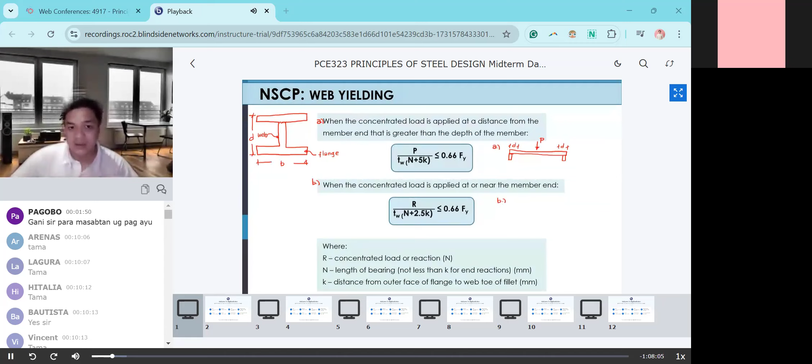For category letter B, this is when the concentrated load is applied at or near the member end. So what we're analyzing, as I explained earlier, I placed the P at our support. It doesn't mean it's literally at the support — what's called 'when the concentrated load is applied' refers to the reaction coming from P.

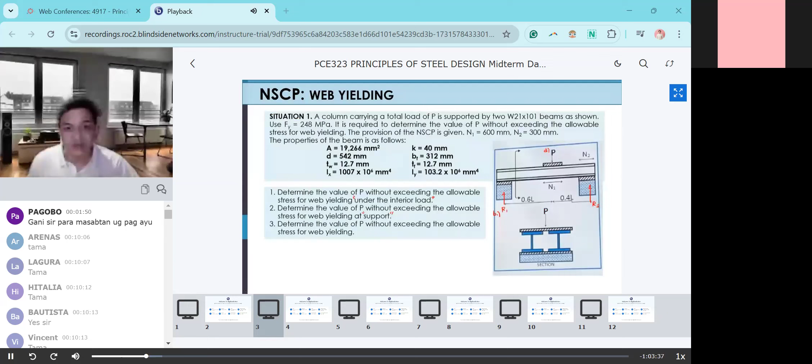Pero under the interior load, so atong gamiton... explain natin ulit kung bakit naging N plus 5K. Take note class, parang low-key lang, manggud ni siyang force over area. Kaning left side, that is just force over area. Ang force po natin class is si P, then ang area po natin is yung area ng ating bearing, kung kinsa tong na-bear na area.

So unsa man tong na-bear nga area? Ang atong thickness sa web, rectangle lang gud na. I-drawing na ako para masabtan. Mao ang bearing area. Kani nakatagilid ba kani kay ito yung length natin, pero pag kuan man good class, magkalat man gud na siya gamay, pa-triangle, so na siya extra.

Imbis na N1 lang yung ating ito yung TW, di ba? TW ni siya, pero yung ating total length, di ba dapat N lang, pero kay pa-triangle manggud na siya. Based sa NSCP, yung pagkalat daw ng ating bearing is kanang triangle, that is 2.5 times our K. Sa kabila din, that is 2.5 times K. So that's why pag yung P yung ina-analyze natin, ang formula is 2.5 plus 2.5 K, that is 5K. And syempre, yung N1 natin nasa gitna, so that is N.

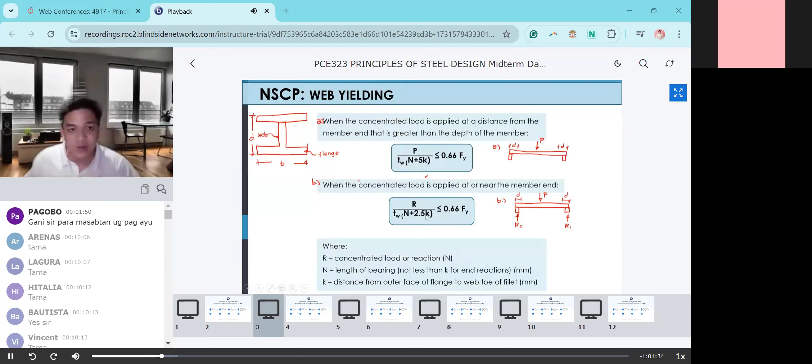So explain naman din natin sa letter B. Sa letter B, bakit 2.5K lang siya? Kasi we are considering our support, then spread kasi sa support is diri lang nga side, asa man pag diri ka mag-spread, wala naman kay mas spreadan dra, di ba? So this is our N2.

Parehas lang sa pikas, no? So ito yung N2 natin, so ito yung extra natin na length, because sa pag-spread sa ating bearing, that is 2.5K. So therefore, pag sa support, that is N plus 2.5.

Timanan ninyo, so hindi ko na to uulitin, no? So P over TW, 0.66. Then i-calculator na mo kaganina, the answer is 1662 sa letter A.

So type tama sa ating chat box kung tama ba yung ginawa natin sa letter A. Are you still there? Yes, how about the others? Yes, very good. Kamera lang yun eh. Sige. That is, yes, that is tama.

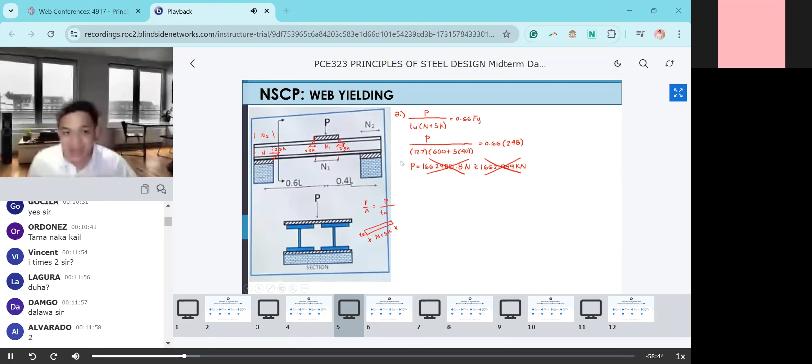Murag og strength of materials, di ba? Pag dalawa, we have two choices. Pwedeng i-times 2 natin yung area. So mag-times 2, mag-2 ta diri di ba? Kani, area man natong ginastoryahan, di ba? Kani, area, duha man na kabuok. So dapat times 2.

So pwede ta mag-force over 2 area. Pwede punta na hation si force, magiging force over 2 divided by isa ka area. Pero parehas naman na, di ba? Ibaba nimo o ana, so namang gyud mga nanang analysis, mali siguro na iya sir kay times 2 na yung area, ako gi-divide na kog 2. That is just the same.

So therefore, ulitin natin yung letter A natin. Pwede ha, again, pwedeng mag times 2 ka sa area, pwedeng mag-divide 2 ka. Parehas lang na. So ang gagawin ko dito, i-divide ko yung P, P man gud na. So ibig sabihin, this is P over 2 and P over 2. So anong gagawin natin? Ito lahat, copy-paste lang natin, pero may P over 2 lang tayo.

Diba? Kay kani man gud siya nga property, pang isa lang siya ka I-beam. Pero take note sa ating problem is, dalawa yung I-beam natin. So TW natin is, multiply ko na lang diretso na, P over 2, 12.7 times 600 plus 5 times 40 is equivalent to...

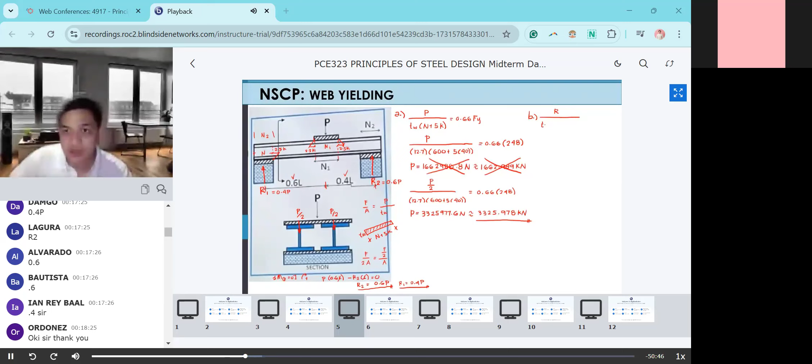Okay, so proceed tayo next. Yes, sabi dito, ang gagamitin po natin is yung mas malaki. Si 0.6P yung gagamitin natin. So formula muna tayo, R is divided by, divided by TW N plus, kapag sa support, yung pag-spread ng bearing is 2.5 lang siya, K. It's equivalent to 0.66Fy.

Substitute natin, R natin na gagamitin is si 0.6P, divided by TW natin is 12.7, N natin, so ang N na gagamitin natin is si N2. N2 ha. Okay, para man siya N2. Ano siya N1? Okay? So N2 based sa ating problem is ayan 300. Plate maguna niya, bearing plate. So plus 2.5, then K po natin is 40. Okay, calculator class. 0.66Fy. Fy po natin is 248.

Sige, isigo gyud. Okay. So what is our P? 1385824. Ay, nahigapay kulang, no? Kung na-discuss na ganyan nato, na mamali na punta diri, no? So 0.6 of P, 'di ba? Pero that is all divided by 2 gihapon. Same sa ginawa natin dito kanina. Okay? So pakidungagan og over 2 si 0.6P. Or i-times 2 na lang na yung answer.

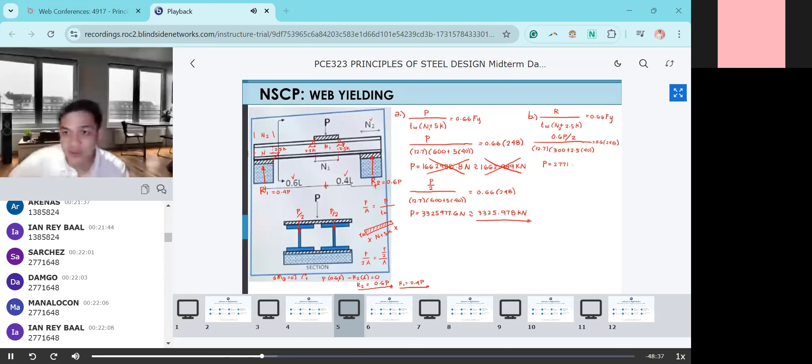That is 2771648 Newton. So P natin is equivalent to 2771.648 kilonewton. Final answer. Ayan. Okay na. Human na gid ta sa first problem.

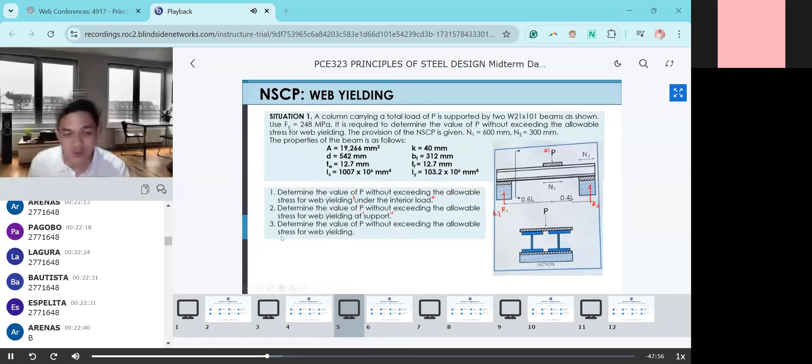So sa letter C, i-type sa chat box, ano yung answer natin letter C? Si letter A, si 3325, or si letter B, 2771? Again, yung question is, determine the value of P without exceeding the allowable stress for web yielding. Bakit sa itong respetuon dre? No? We have two types of web yielding. I-respect nato si P, i-respect nato si support. So paki-type A or B?

Yes, ana gid dapat. Ang dako. Kung magkuan ka, kung mag-design ka tapos ang isa makaya na 3-3, ang sa kani sa gitna na bearing. Ang support ang makaya lang niya 2771.

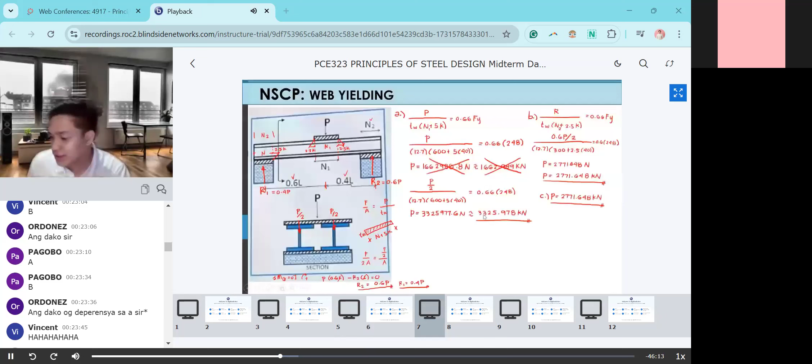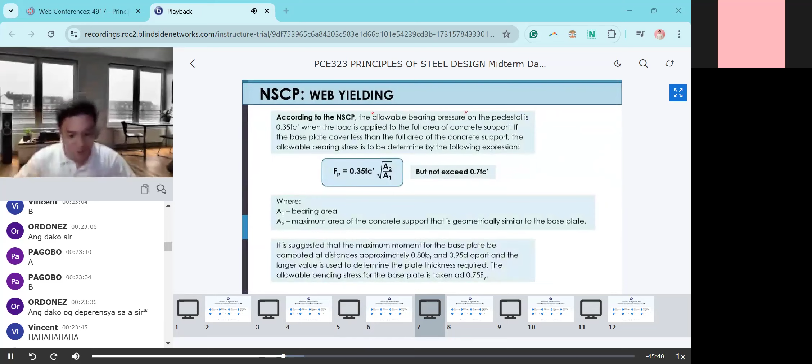Sige na, ilisdan lang ako ng label sa taas. This is under allowable bearing pressure. Daghan makarelate ani kailang mag-agi-agi gud sa dalan no. More on kuan na biya ta karon, more on steel structures na ta.

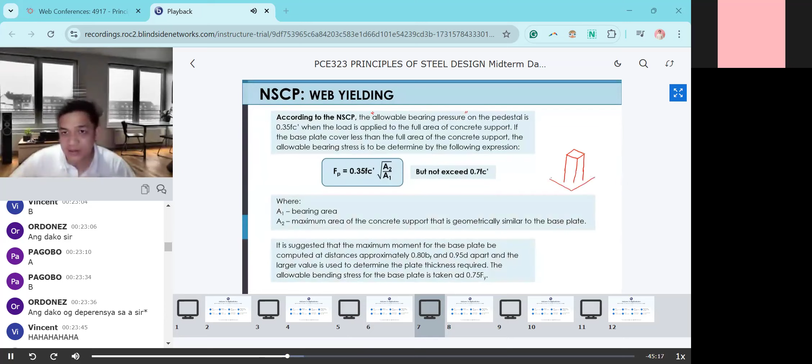So sa mga steel structures class, meron po tayong tinatawag na pedestal. Kailan maguro mo pedestal no. So ang pedestal is combination of concrete and steel. So, di man na makitaan kay sa lalom man ng uban, no? For example lang ana na sa ilalom sa yuta. Tapos mao na yung ato ang footing. Kapangit sa footing gamay kaayo.

Ang pedestal class is concrete tapos butangan nato na og kuan bearing plate. Di na pwedeng concrete tapos katong I-beam dayon nga kuan no, katong channel dayon kang column, dili pwede. Ito yung tinatawag na base plate. Tapos natay naka-I man na siya, channel. So mo na dayon nakatindog. Ang kasagaran ka ng sakuan god sa mga basketballan, 'di ba? Ito yung tinatawag na pedestal. Pedestal. So concrete, then bearing plate, tapos yung channel.

So muna yung combination. So according to NSCP, na-ilisdan lang ako ng title dili na siya web yielding. According to NSCP, the allowable bearing pressure on the pedestal is 0.35 FC prime. So ang pedestal mismo, then contact niya sa concrete, 0.35 FC prime daw yung kanyang allowable bearing pressure. When the load is applied to the full area of concrete support. So ibig sabihin yung ratio ng ating concrete is the same ratio ng ating bearing plate.

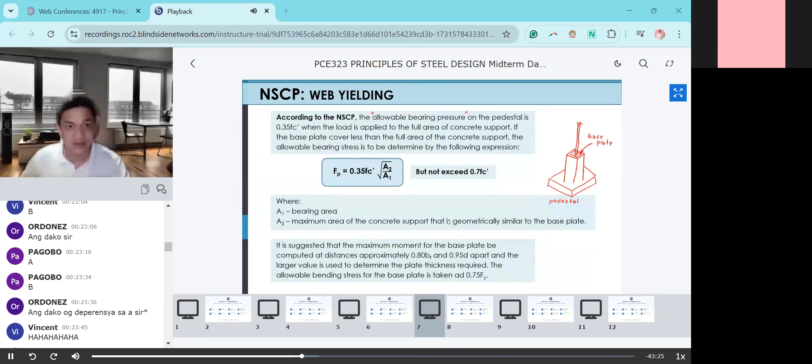However, minsan kasi hindi siya magka-ratio. So if the base plate or bearing plate, pero ang sakto gid ang term is base plate. Base plate. I hope that you could imagine, no? Kanagong na kay kanang sa mga gym. Tanawa god duula god. Diba? Kanang I-beam dili na dito nakatindog sa ato ang concrete. Napa na siya base plate tapos katong iyang I-beam din ta or channel. So the base plate cover less than the full area of the concrete support.

The allowable bearing stress is to be determined by the following expression. So, ibig sabihin, kapag yung ating area ng concrete, hindi kasing laki ng ating base plate, so ito yung ating formula. So, imbis na 0.35 FC prime, madadagdagan tayo ng square root of A2 over A1. Pero dapat daw hindi mag-exceed sa 0.7 FC prime. So, yung A1 natin is the bearing area. A2 natin is the maximum area of the concrete support that is geometrically similar to the base plate.

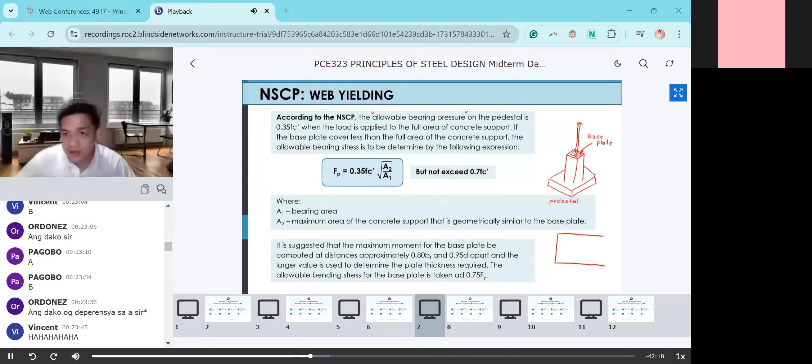So, ang A2 niya, ang A2 class is in ani. Drawing lang kadiyot lang kayo. Example, mao ni ato ang concrete. Tatog arrow, concrete. Mao ni atong base plate. Naka-rectangle. Base plate. Then, sa sulod sa base plate mo, itong nanatay channel. Ayan. So, ito yun. No?

Kapag yung concrete na area, hindi siya ka-same sa base plate, ang gagawin po natin is A2 over A1. So, yung A2 class is geometrically similar nimo siya sa base plate na area. Kasi pasabutan ng geometrically similar, sir. Ang i-ratio na nimo siya. So, murag, kuan ba? I-extend nimo siya. So, therefore, kanilang siya. Gets ninyo? Pag square tapos rectangle, I hope na ma-imagine ninyo. Pahaba man gud siya. So, pag i-spread na to ang base plate, geometrically similar. So, kaning mga nasa gawas, di na apilon.

So, yung nasa loob, ito, kanang naka broken line, yan yung A2 natin. Okay? So, sige lang. Okay, drawing mo na to, balik na unya. So, mo ng A2, mo ng A1. So, it is suggested that the maximum moment for the base plate be computed at a distance approximately 0.8 BF and 0.95 D apart at the larger value is used and the larger value is used to determine the plate thickness required. So, kunin daw natin si 0.8 BF, 0.95 D. Sino yung mas malaki, siya yung gagamitin sa plate thickness. The allowable bending stress for the base plate is taken as 0.75 FY.

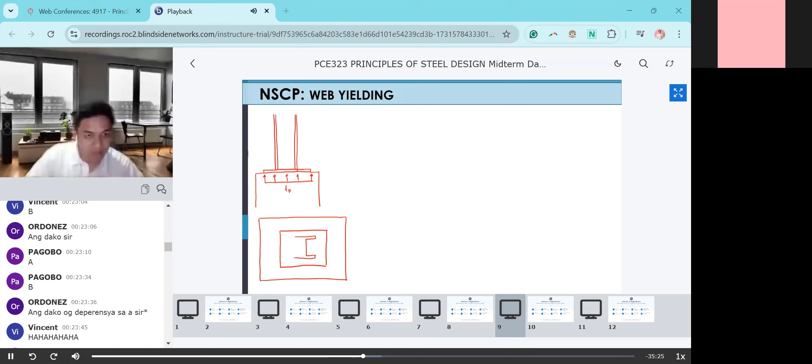As mentioned earlier, we need A1 and A2 because our base plate does not cover the same area as the concrete - it doesn't cover all of it. Based on our properties, BF is 254 mm, and depth is 306 mm.

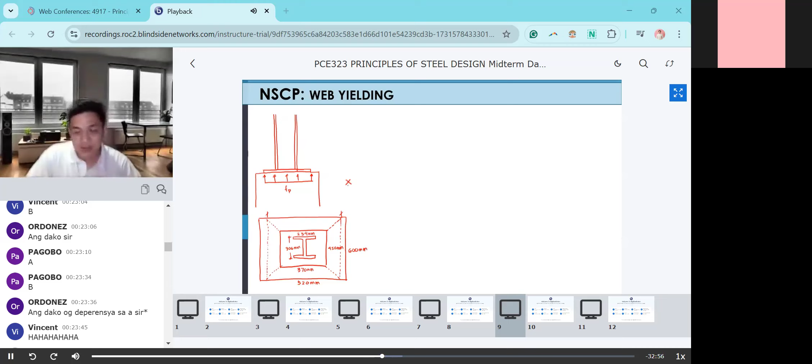Let's solve for that. So X divided by 600 is equivalent to our 370 divided by 450. Again, it spreads evenly.

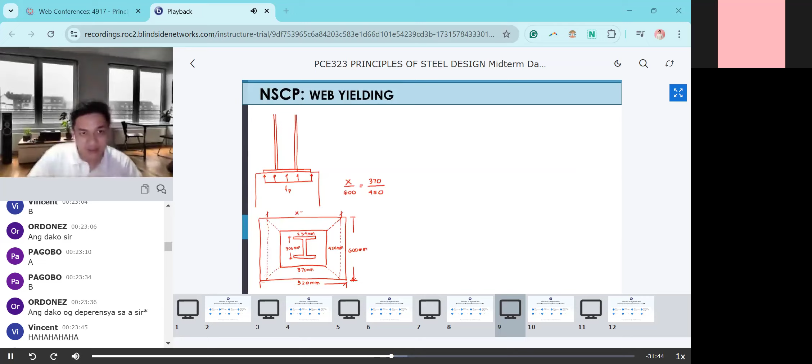So therefore our 520 gets reduced. So we have X over 600 equals 370 over 450. Please calculate, class, what is the value of our X? That is 493.333 mm. We're going slowly here.

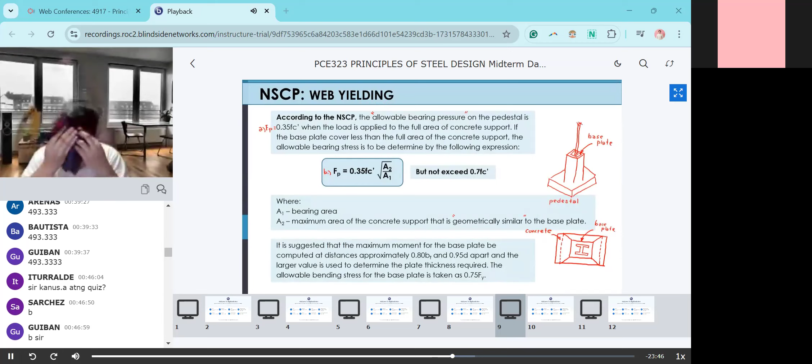Kuya, wag pa ko tayo ay sir ka na sa atong quiz. Siguro kuan class, ang initial na to nga plano is karong Sunday, pero ano man god? We have a lot of things, they have a lot of topics. Kanang murag para mo sink in lang sa utok ba. So gawin na lang siguro nating next week yung ating, sige lang, bawi na lang ta sunod. Kumbaga, I'll make it happen.

Dili ta mag-quiz na lang, dili na lang siguro ta mag-quiz nga dinalian. So next week na lang atong quiz Sunday, tapos next week ang atong midterm. Pero kung na siya klasa, next week pa atong midterm, pero nahuman na itong topic karong Friday. Mahuman na to karong Friday, Saturday. So mag-start na ko og klase pang finals. Pero madelay lang atong midterm exam. Ano na lang.

Okay, para di pod magyapon. Lisod magyapon ta. So i-delay na lang nato siya 1 week. Pero mag-start na ko sa topic sa finals.

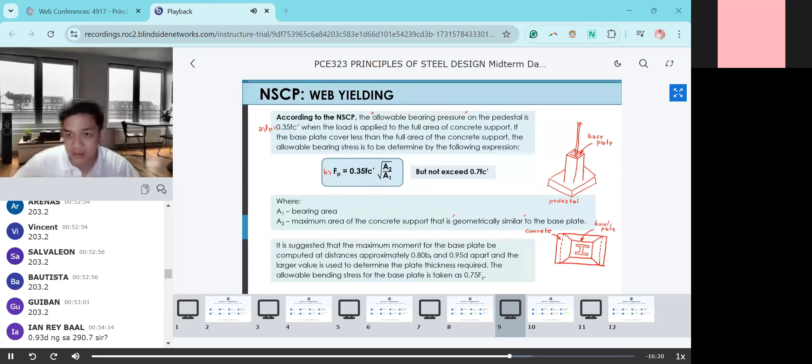Our A1 is the area of our base plate. That's why it's called bearing plate, right? Or base plate. Base slash... let me spell it. Bearing plate. So that is just simply, let me write it. Bearing slash base plate. Okay.

So our A1 is the bearing area or base plate area. But let's continue using this. So, therefore, at the bottom, that is just 370 mm by 450 mm. Then, at the top is symmetrically, geometrically similar to the base plate area of our concrete. So based on earlier, we already solved that. That is 600 by this X. See, they're symmetrical.

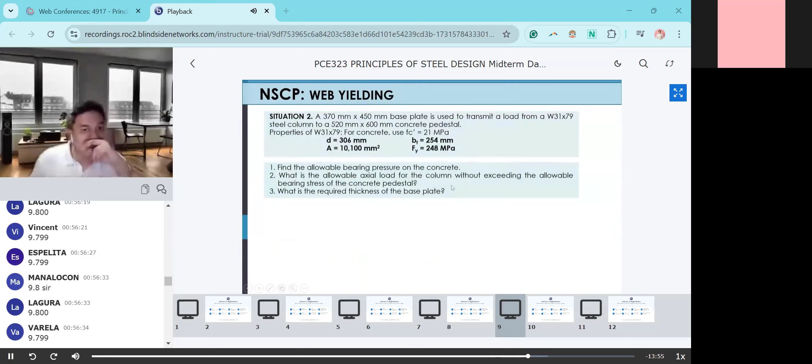So again, that is the allowable bearing pressure on concrete. Next, what is the allowable axial load for the column? So load P, we're looking for, without exceeding the allowable bearing stress of the concrete pedestal. So we already have the allowable bearing stress coming from our number 1.

What we're looking for is load P. So it's just force over area. Letter B is equivalent to FP, which is equivalent to force, which is P, over area. What if load P is over area? So the question is, what area do we use? Of course, the area of our base plate. It's stated, what is the allowable axial load on the concrete pedestal? We use the base plate.

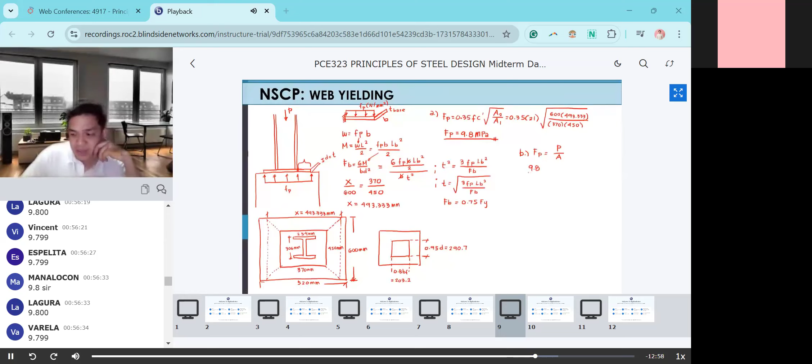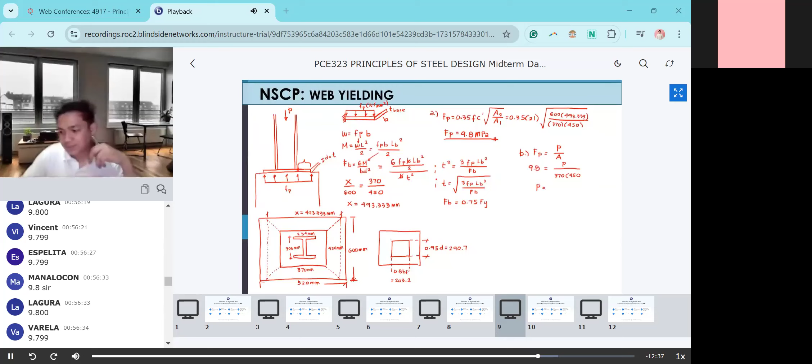So FP, we already have FP, 9.8 MPa. Right? Then equals P, then divided by the area of the base plate or bearing plate. Base plate is 370 by 450. So what is our P? MPa, MPa is Newton per mm squared, so Newton is our answer for this.

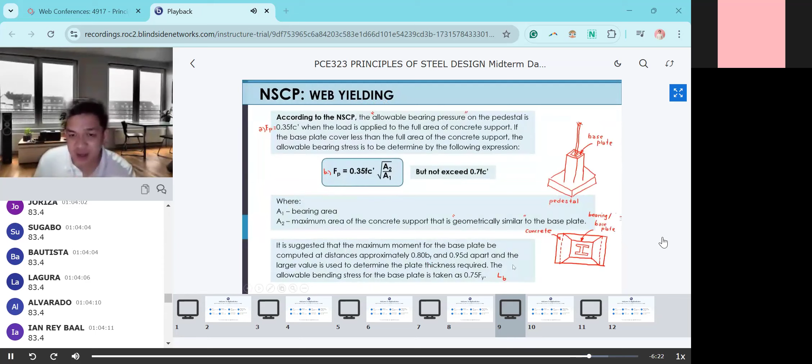83.4 squared divided by - using this formula - FB. Our FB is 0.75 times FY.

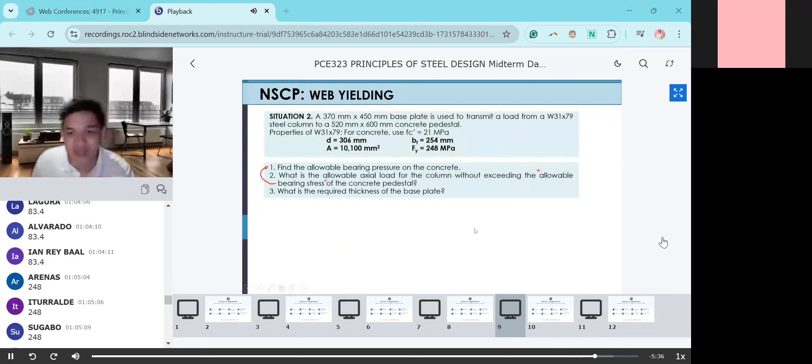Is FY given? Hello, FY? None, please chat in the chat box - what is our FY if it's not given? But again, when it's not given, yes, that is 248.

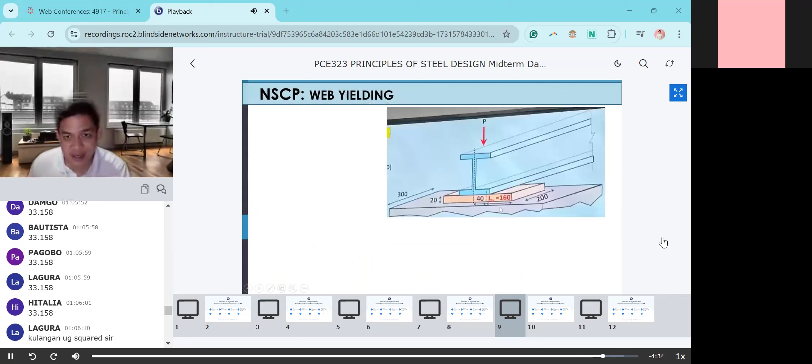Okay, so unfortunately we couldn't proceed with this last one due to technical difficulties earlier. But again, let's call it a day.